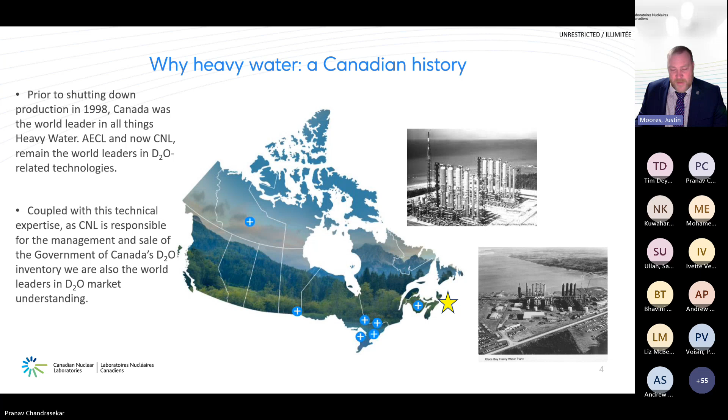I'm a geneticist, so I'm only going to stick with a very little amount of chemistry here. We've got plenty of chemists on CNL staff that know this infinitely better than I do, but hydrogen really has three isotopes. There's protium, which is normal hydrogen, which has one proton, no neutrons. Deuterium, one proton, one neutron, twice as heavy. Makes some interesting changes to its physical characteristics, and about 150 parts per million naturally abundant.

And then there's tritium, which we also deal with quite a lot. In this one, it's one proton and two neutrons, and this is radioactive. So light water, H2O, heavy water, D2O. The important part here is that it has some very important nuclear, physical, and chemical properties based on that extra neutron. A nuclear reactor grade heavy water is virtually pure D2O. Jump ahead.

So what is it actually used for? So in nuclear, this is actually a neutron moderator and heat transport fluid for CANDU and other heavy water-based reactors. Happens to be an incredibly good neutron moderator because of that extra neutron. In terms of non-nuclear, because it behaves similar to hydrogen but not quite, it actually has many uses in electronics, life sciences, environment.

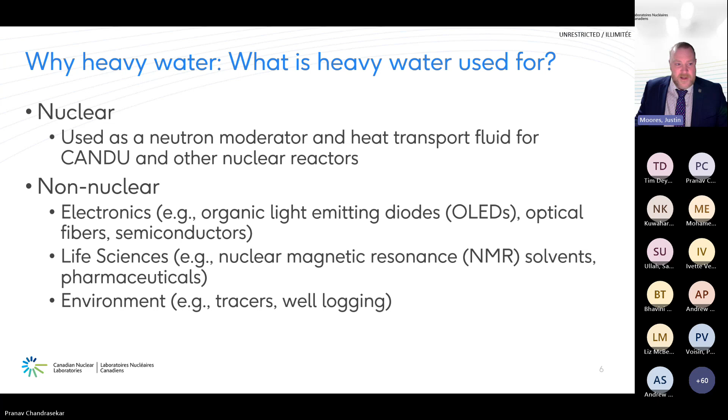One interesting one, if you have a fiber optic internet connection, you probably have a little bit of CNL, AECL, deuterium running into your house, because virtually all of the fiber on the market at this stage actually contains a very little bit of deuterium. And CNL, through our distributors, IsoWater and others, have been the supplier to the vast majority of heavy water over the last 10 to 15 years. You can jump ahead.

So now I'll get into who we are. One important piece is that we have developed as a national lab several important technologies here and the expertise to deploy them. Let's jump into the next one, Pranav. We were formerly part of Atomic Energy of Canada Limited. We are a science and tech organization with three key missions. One is clean energy for today and tomorrow, restore and protect the environment. We actually are responsible for cleaning up historical radioactive waste on our site and others. And we contribute to the health of Canadians.

We are actually an odd beast in Canada because we work under a government-owned contractor-operated model. Our headquarters are at Chalk River, but we work with the government. We are not part of the government formally. Jump ahead.

So what's our role in this conversation? So AECL was historically responsible for the development and commercialization of CANDU. That was actually moved over as part of the GOCO transition to our good friends over at Atkins. So the reactors themselves are actually through CANDU Energy Incorporated, an Atkins company, but they require a large amount of heavy water. And historically, that's why AECL ran these plants.

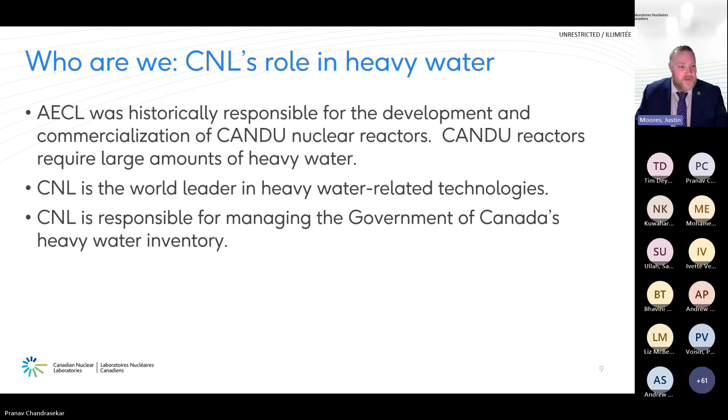Once the need from CANDU disappeared, then the plants were no longer needed because there was a gap between what we knew we needed and how we would actually move that into other industries. We are the world leader in heavy water related technologies, and we're responsible for managing the Government of Canada's heavy water inventory, as I mentioned earlier. So frankly, we know how to make it, we know how it's made by others, and we know how to sell it, with the support of our distributors. You can jump ahead. So noting that, what about the market? Next one, Pranav.

So pricing, this is going to be an interesting one for everybody. We're only going to give publicly available information here because this is a public forum. But in 2023, India exported about 100 tons, megagrams, of heavy water with an average trade value of 460 US, about $600 Canadian per kilogram. We do sell at more than this trade value. That's the one bit of IP you're going to get out of me today, because IP is my world.

In terms of non-nuclear market size, North America and Europe are well over 100 tons per year, and the cost based on our modeling is projected to be considerably less than trade value. I'll be turning it over to Nick in a few slides to talk about our technologies. But we can make it for much less than we can sell it. We do need partnerships with hydrogen producers in order to do so. This is a synergistic process. And again, I'll leave it to Nick to talk through some of the technical details.

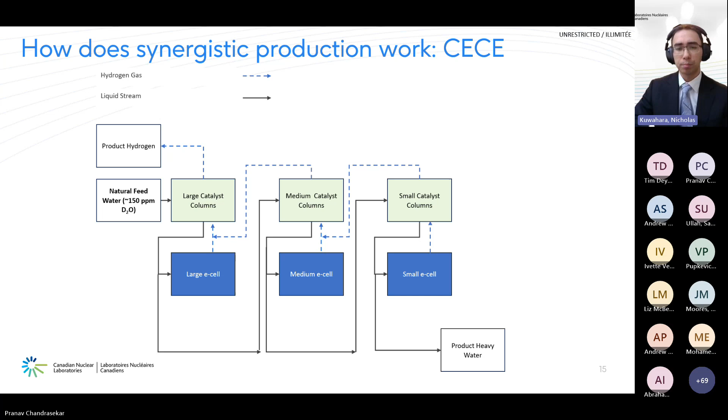So CIRCE is a process that extracts deuterium from a hydrogen stream produced by steam methane reforming. Again, it uses our proprietary platinum-based isotope exchange catalyst, negligible incremental energy requirements, no toxic substances, and doesn't impact your hydrogen production capacity. So the CIRCE process is basically the first enrichment step towards making heavy water. The output from CIRCE brings your water from about 150 parts per million to 6,000 parts per million. So you increase the concentration by a factor of about 40.

And then you combine the output from CIRCE with other processes to enrich from your 6,000 parts per million up to your 99.8 weight percent. So you could have a CIRCE followed by CECE steps to get you to your desired concentration. And for CIRCE, about 1,500 megagrams of hydrogen in the steam methane reformer gets you about 1 megagram worth of heavy water at the end.

So if you click, please. On the left, we've got a simple diagram for a steam methane reformer, and on the right, it's a steam methane reformer with CIRCE. So on the left, we've got methane coming in with about 100 parts per million deuterium, water coming in at 150 parts per million. Hydrogen goes out, and the CO2 goes out.

When we go for the CIRCE process, your water is introduced to the system at the top of the catalyst bed, and it flows down through the catalyst bed. The liquid outlet from the catalyst bed gets split off. Some of it is your product to go on to further enrichment. The rest of it goes down to the steam methane reformer, where it's combined with methane to produce CO2, and then the hydrogen that's produced goes up through the catalyst bed to produce your product hydrogen.

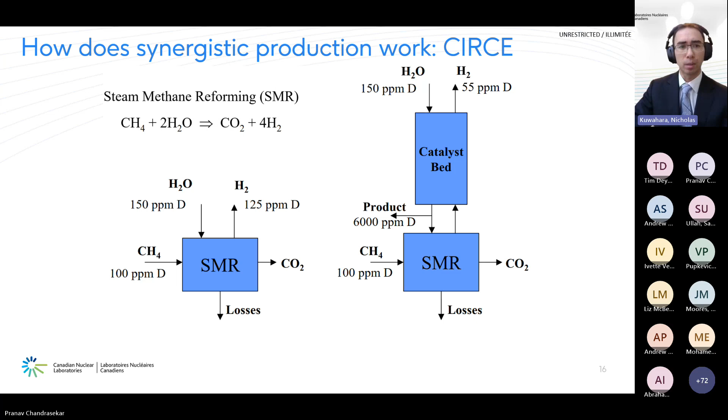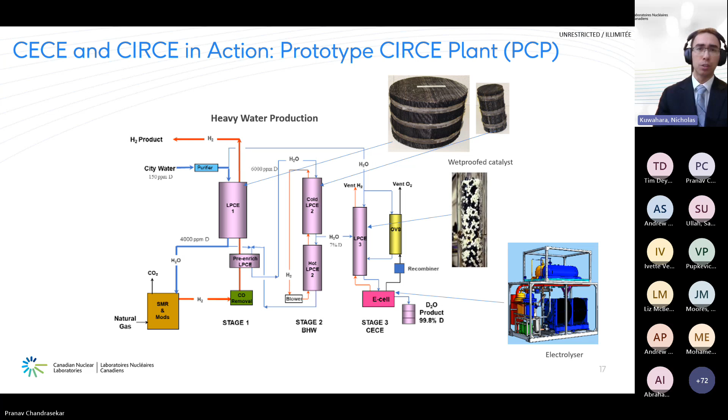And we can get into more details. Obviously, some of that next step conversation will include some technical aspects, because there are tweaks that are necessary to plug this thing in. But it is relatively straightforward, and we do have the expertise and experience to do so.

So summarizing what's next, we are looking for partners that are producers of hydrogen in order to effectively find our mines. We're looking for hydrogen to mine for deuterium. And we've got a couple of ideas on how that could look. We'll chat about some of those in the roundtable, but others would probably stay for one-on-ones. We'll be looking for the partners and working on the feasibility of deployment of the technology, and we are experienced in working on and negotiating those types of arrangements.

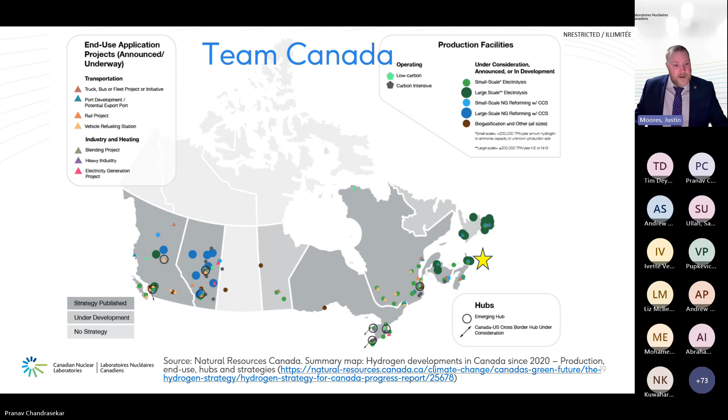Thank you so much, Justin and Nicholas. My takeaway from this really good presentation is there are opportunities for additional revenue streams when you produce hydrogen, and that's really good news. I'd like now to invite our other colleagues to turn on their camera.

Thank you, Sabrina. And I can hear myself twice. That's a bit much. So someone may want to be muted. All right, so I can only hear myself once. That's better.

So I wanted to now have a little bit of a conversation, all of us, about heavy water and the many opportunities. I'm going to start with a very broad, open question to all of you. What brings your company into the heavy water world? I know I heard a little bit from CNL, but in general, what brings you to the heavy water world? Sabrina and Andrew. And Justin, you can also chime in, of course. Yeah, sure. So I'll let Sabrina take this one.

Okay, great. Hi, everyone. So what brings AtkinsRéalis to the heavy water world? Well, it's CANDU nuclear reactors that bring us to this discussion. As you know, the world is embarking on a nuclear renaissance, and we are talking about nuclear new builds, which is great news. And that includes Canada's own CANDU reactors, looking at bringing those back onto the market for new builds. So CANDU, which stands for Canada Deuterium Uranium, uses heavy water, right? It's in the name, deuterium for deuterium oxide, and it uses a lot of it.

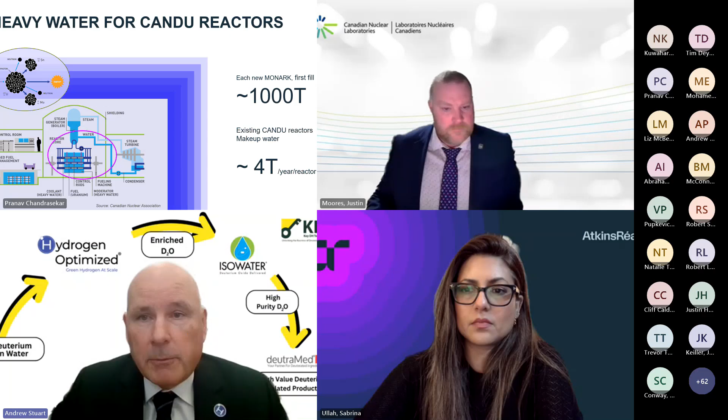And so we have a range of facilities. We have a 40-ton per year heavy water production facility for enriching lower percent heavy water. And if we get the slides up, we'll show where we're building out initially a 5 to 20 ton per year heavy water production and moving that towards 200 tons a year as a long-term objective.

So I'd like to show those pictures if I can, if we have the time. But anyway, Pranav, are you able to get them, or should I try to put them in? I can pull them up if you guys would like. If you can present, please pull those up. Pranav, if you could stop presenting, that'd be great. Okay. Oh, actually, they're up now. There we go. All right.

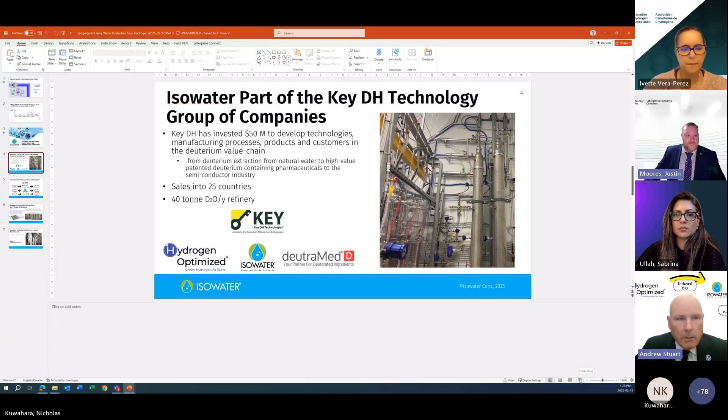So what you can see, as I say, Isowater's part of this group I founded 15 years ago. And on the right, you see our 40-ton per year heavy water refinery, which does final enrichment of heavy water that we make in the field or recycle from clients or other sources. Go to the next slide.

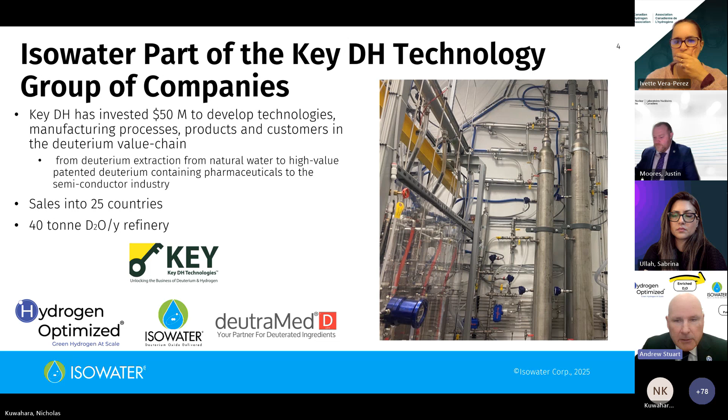One more. And this is our D2X process. We take the deuterium from natural water, we enrich it partially up, and then Isowater takes that to make.

Oh, you muted yourself, Andrew. Technical difficulties today, everyone. Okay, good. Sometimes people like to mute me.

We take the high purity and we go out to the world with it, but also to our own clients where we make high value products, for example, semiconductor gas, where we sell that to companies like LG and SK and Samsung and others. Okay, thank you. Next slide. One more. Okay. So here's how we make heavy water from natural water.

We start with remote electrolysis plants in the green hydrogen world, hundreds of megawatts. They can be 50 megawatts here, 200 megawatts there. It doesn't really matter. We do enrichment, and then we transport the enriched deuterium to our own internal facilities in Owen Sound, Ontario, where we've got quite a lot of electrolyzers, and we can do the final enrichment to the client's needs.

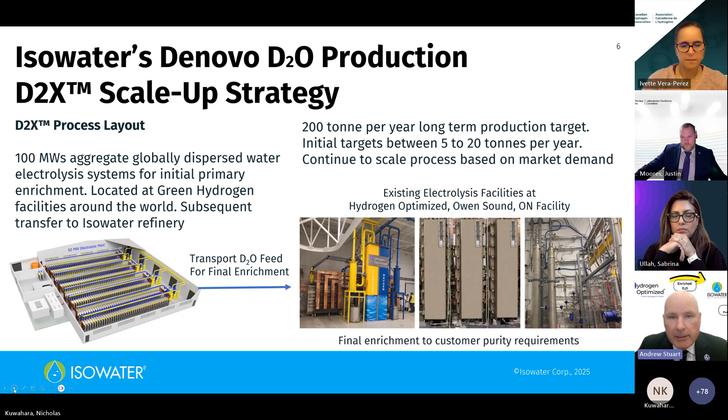Ultimately, in this 10 years plus, we'd like to be able to make 200 tons per year, and in the near term, 5 to 20 tons per year, and just scale up incrementally as we build out or partner with hydrogen plants. And next slide. And so we seek partners of all sorts, from finance to project partners, electrolyzer developers, technology.

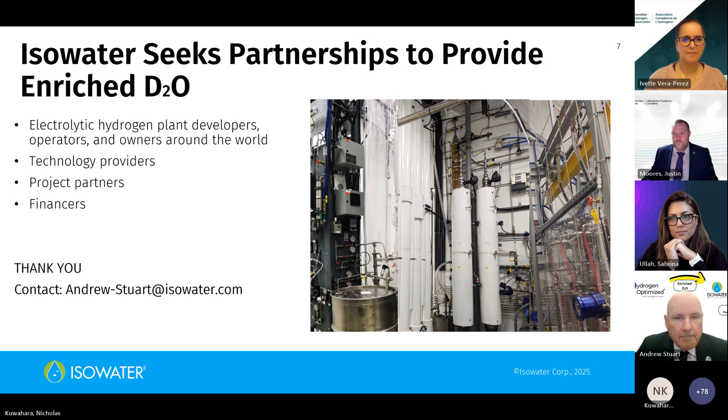Thanks so much, Andrew. If that's all right, everyone, I'll ask the next roundtable question. Justin, you made a little bit of reference to this, but I think it's really important because part of the essence of our work is to try to find opportunities for our members. So what is the market for heavy water, for deuterium, and the business case for heavy water? If all three of you would like to chime in, that would be fantastic.

Well, I'll preface this one with a bit of a heads up to Pranav. Pranav, if you can prep the AtkinsRéalis slides. So these are the first two you just had on there. Leave it at this one for now. Thanks.

So this is a very interesting market. And Andrew's likely going to grin at this one because, frankly, if we can get it, we can have it sold yesterday. And this is not typical. The challenge really is predictable and reliable supply, because it hasn't been produced in the Western world in quite some time. And there are huge geopolitical challenges to accessing what little supply there actually is.

The prices are very solid, and with the growing possibility of new CANDU and extra needs within the nuclear and non-nuclear market, the possibilities here are really immense. And the offtake agreement, the transfer from I have an idea to I've got a buyer, that issue isn't an issue here. Most of the distributors and downstream users would be more than happy to sign on and say, I will take what you can make. If anything, it'd be a bit of fending off some of the market, as we found in recent years as supply has gotten tighter and tighter.

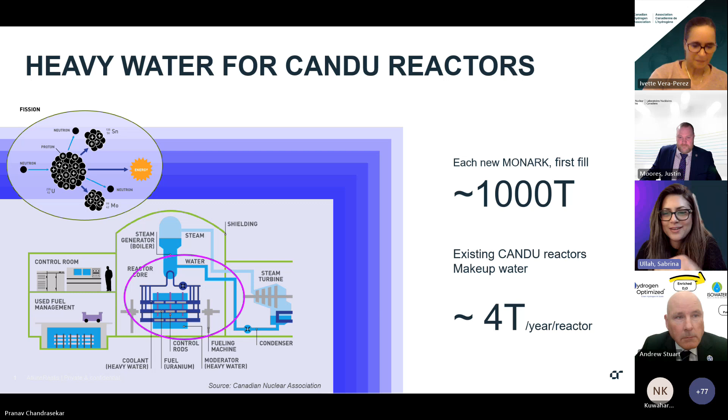I know that we're a minute or two behind time, but I really had some really good questions for the roundtable, so I'd like to carry on if that's okay. Okay, market is huge. We have established that. What is the timeline to get to that market? And somebody mentioned 20 years, etc. But timeline, what do you guys say? Maybe I'll go for that one, and maybe now we can put up that next slide. Yeah. Which I have. There we go. Now I'm ready to show it.